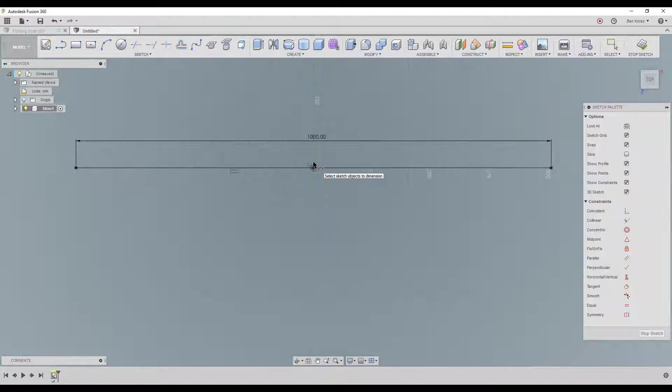So let's start, and I'm going to start with a new sketch here and create a line from here to here, and I'm gonna constrain it in the middle. Give it a dimension. It's gonna be 1 meter. Let's go a little bit back. I'm gonna drag it a bit more up and gonna create now the back side here.

I'm gonna again constrain it to this point here. Give it a dimension. It's gonna be something like 250, and I think it's going to be enough. Maybe actually 280. Let's say it's 280. Okay, and let's see if we need something else. No, we just need to turn it into a construction line.

And now we're going to work on the shape from above. So I'm going to use the spline tool. Let's see how many points I'm going to need for this one. I think I'm going to need only 3 points. I always like to start with less, and it's going to be something like that. I'm going to mirror it to the other side. And this is just to give me an idea how it's going to look and if it's the shape that I want. And I think it looks actually okay, so we can move on to the next piece.

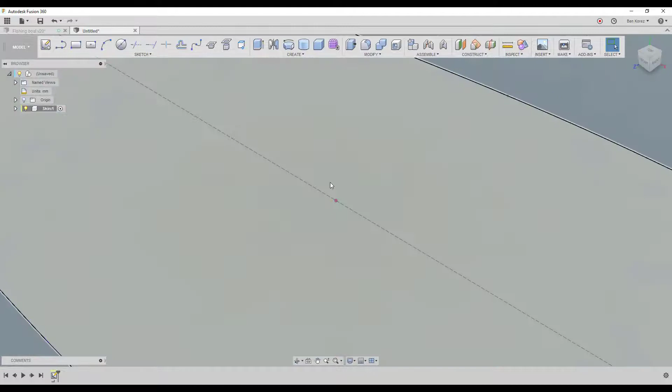I'm not sure, we can change it later, but okay, let's stop the sketch and move on to the next, and it's going to be the back. Now the order that I'm doing the sketches is quite important, and when you're gonna try it yourself, you're gonna understand why. So I'm gonna go into the plane at angle, choose this one and choose this sketch here, give it 70 degrees, something like that. I think it will be okay. You can also give it 90 degrees, it's up to you. Maybe 75, and click OK.

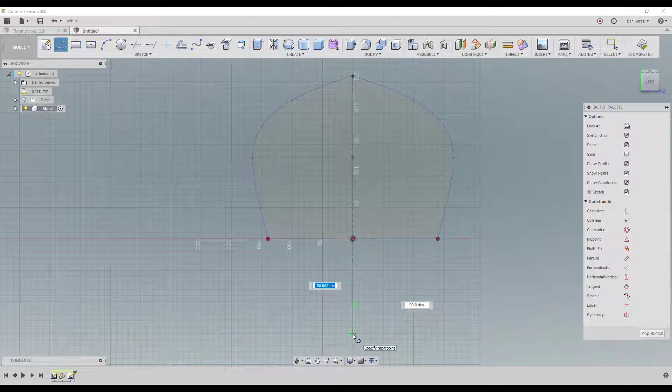Good. And now we're going to create a sketch on this plane here, and then I'm going to project this point and this point and this one here in the middle. I'm going to start with a straight line. Let's create a dimension, 150. It's okay right now. And I'm gonna create another straight line here and somewhere about here, and another one that goes all the way here.

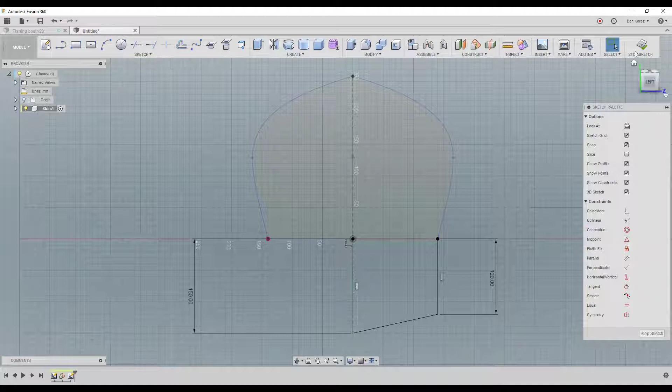Good. I don't care about the other side for now, and we'll see how it goes. We can always change it. So far so good. Again, dimensions are quite important. If you can give them now, do it now. If not, do it later. But don't forget them, because if you're gonna change something, it can screw up many things, so remember that. Another thing is I need to turn this one into a construction line. Okay, we finished this sketch.

Now we can move on to work on the side, and we're gonna do this one here. We're gonna project this point here, and let's see, I'm going to project also this one here. And now we can go into the spline. You don't have to use the spline, I just feel comfortable working with the spline.

And I'm just gonna create the shape of the bottom. Let's see, maybe I'm gonna need to use some extra points. I'm just gonna hit the control key while I'm playing with it. And maybe I'm gonna move it just a little bit more down here.

I think maybe the back side here, I need to make it a little bit longer. But we'll see. And yeah, I think I'm gonna need to add an extra point here. So no problem. Insert spline fit point. It's gonna be somewhere here.

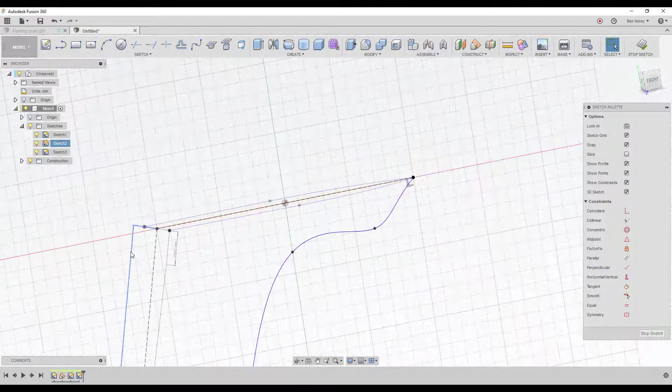Yeah, that looks much better. But this one I need to make it longer. Let's see if I can do it from here. And I need to show the dimension. Can I see it from here? Yes, but let's see, instead of 150, I can give it 170. No, something went wrong. Just go back. And maybe, yeah, that looks better.

So as you can see here also, I don't have to stop it and go back to the other sketch and all that. I can do it from here. And I'm just gonna make this one a little bit more straight. Yeah, something like that. That looks fine. Good. And now we're gonna stop this one. Next, I'm just gonna hide these dimensions.

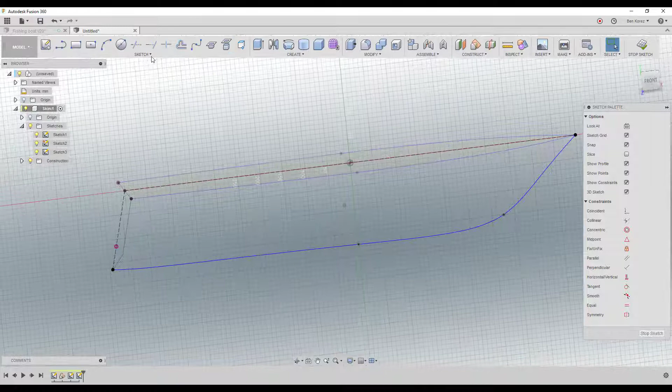There is one thing I forgot, and that is I need to project also this point here. And now I'm going to make a point. Where is it? Right here. I'm going to put it somewhere here, and I'm going to create a horizontal constraint between this one and this one. Next, something very important, I'm gonna break the line here. This is very important. Ignore the warning. I can turn this one into a construction.

Yeah, that's it. It's important because when we work on the loft command and create a second line here, it's going to help us shape the boat, the hull. So we can create a loft between this line here to the next one, and then to the bottom one. If we didn't do this, it would be one long line all the way up, and it would give us an error. So that's why.

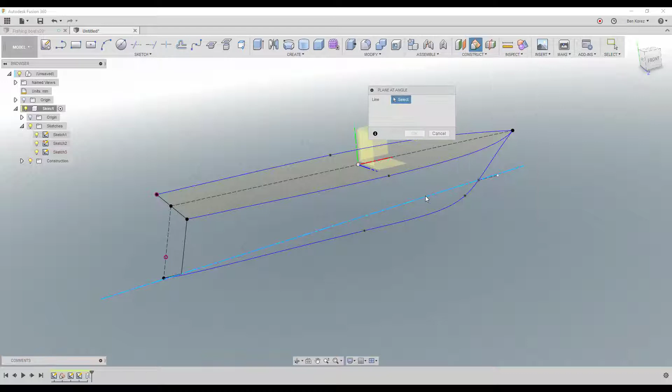Okay, so now we can move on to create 2 points here. I wanna do this one and this one here, and I'm gonna create plane at angle and give it 90 degrees and click OK. I can hide the axis here, and yep, that's what we wanted. So we can create a sketch here. It kind of turned on me. Okay, good.

Now we need to project this point here, and this point here. Going to the top view again, and we're gonna use the spline as before. We're gonna follow almost the same shape as we did earlier. And now I'm just gonna move this one a little bit more into the inside, and we can always change it later. But let's see how it looks. I'm gonna stretch it a little bit more.

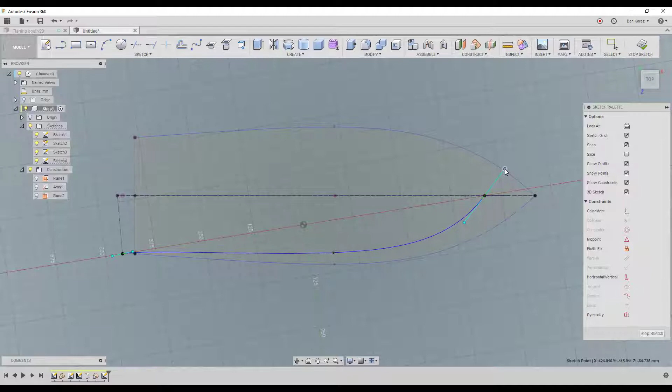Okay, I think it looks fine. Let's leave it like that for now. Maybe there is too much spacing, I don't know. Let's do it like this. Good. We can finish this one. We don't have to mirror it to the other side. Now we can go and start doing the lofts. We can go into the patch environment, go into loft, create loft.

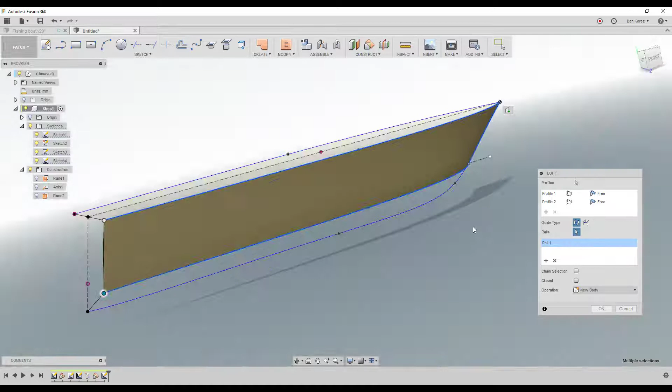Oh, sorry, something was selected before, so we can create a loft between this one and this one. Let's see if it's gonna let us create another loft here. Click on the plus. No, doesn't matter, it's not really that important. And then we can use this one here as the rail, and also this one here as the rail. Now let's turn them back on.

Create a new loft, and this one is going to be between this one and this one. Oh, sorry, I need to click on the plus because they are kind of connected to each other. And we need also a rail here, which is going to be this one here. It's very important not to forget it. Okay, good. Now it's plus minus what I'm looking for, and it looks not so bad actually.

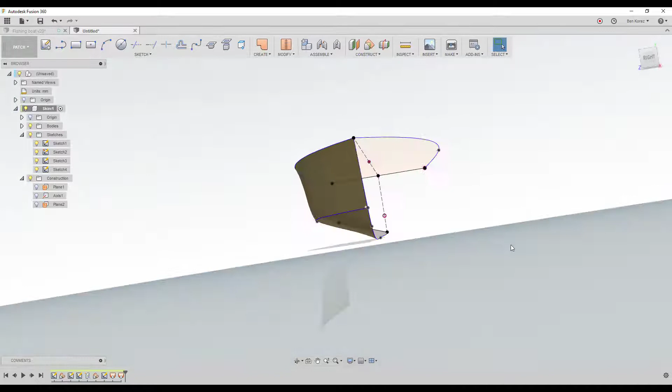So I'm going to put them together. I'm going to stitch them, and I'm going to mirror everything to the other side. So I'm going to mirror the body here, all the way to the other side. As you can see now, our boat starts getting shape.

And you have the option now to create also the back, or you can do it later. It doesn't matter really at this point, but I'm gonna create it now. Let's see if I can, no, I need to turn some of the sketches off maybe. I just need to do something like that.

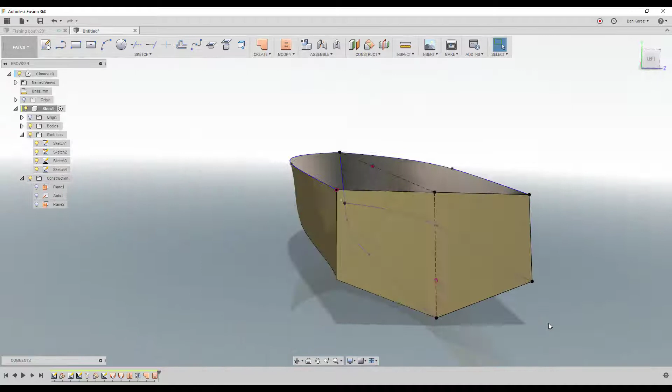Okay, and it looks okay, looks fine. So I'm gonna stitch also this one and this one together, and yeah, so far so good. It looks kind of the shape that I was looking for. Now I just want to make sure something here, that it's completely straight here at the top.

It looks really nice. Okay, next, now this is the skin. Now what we left to do is we're gonna thicken the whole body here. So I just want to make sure that we have no, see, we still have those two bodies which we need to stitch, this one and this one. Click OK, so now we have only one body.

So now we can thicken everything, and we need to thicken inwards. Okay, and we're gonna give it, let's start with 2 millimeters. And I think it will be just fine with 2. Again, don't forget, this is just a very, very small model. Okay, and click OK.

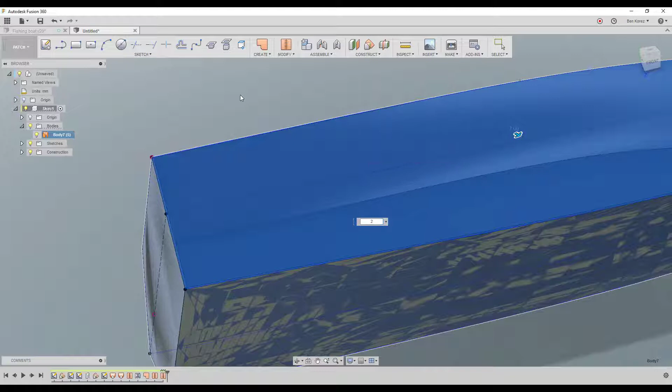Good, so this is our skin. Next, what we need to do is we can hide all the sketches. We don't need them right now. And now we're gonna work on the ribs. So we're going to right click here at the top, new component, and we're gonna call it ribs.

So we're going to create and then offset. So we're going to offset this face here, this face, this face, and this face. If you want to give it some space, you can give it a space here, but I'm not, and click OK. So we can hide for now the skin, and so we got this extra pointy here.

Now if we want, you know what, we can go back and take everything. Maybe it's gonna help. Let's see. Oh, it's not gonna help, but it doesn't matter. We don't really need it.

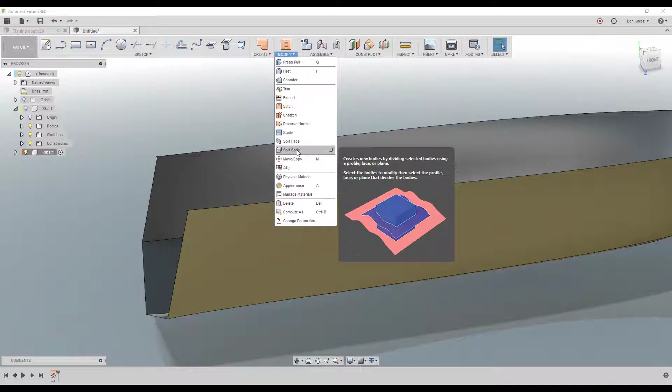So but we're gonna create, I think, a new set for this part. But to be honest, personally, it's kind of annoying me, these points here. So let's see if I can fix it. I'll look for a splitting tool. So I'm gonna go into, it's not this one, maybe it's this one.

Wait a second, I'm just gonna turn the skin on. I think it's this one, yes. Okay, yeah, now I see why it took everything. So never mind, we can cut these points in the end if it happens to you. Okay, so we're just gonna ignore it for now. It's not a big deal.

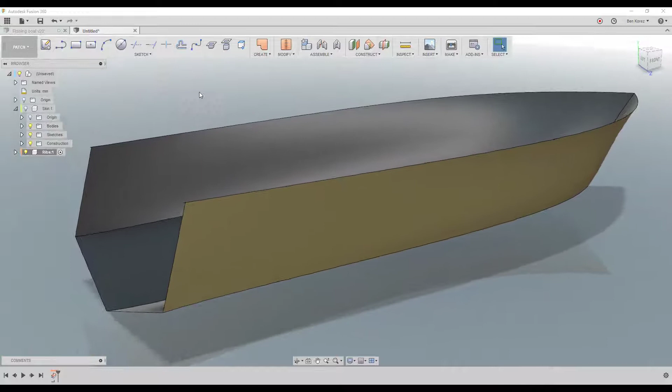So we're going to work on the ribs, as I said, and we need to give it a thickness. Second, I'm gonna select everything here, and it's going to be, yeah, again, depends on the ribs, how thick do you want them. And I mean, inwards it can be maybe 10, something like that. Okay, and then we can click, we finish with this one, can click OK.

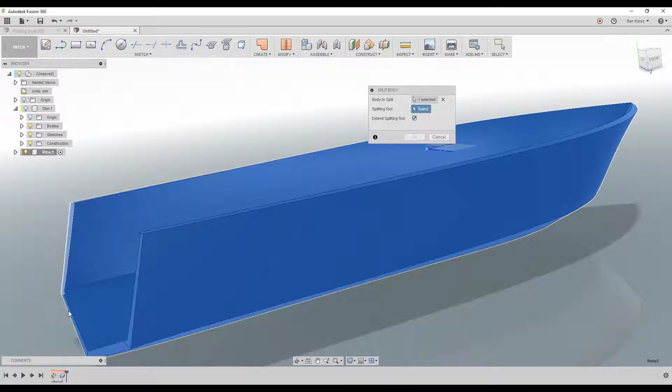Actually, this point we can actually also much easier to get rid of, but again, as I said before, doesn't matter. But I can show you actually how we do this. We can just go into split body, go into this one here, then we choose this face, give it a few seconds. So it's not gonna take all of it. No, never mind, forget it for now.

And yeah, it's stuck now because my stupid mistake. So sometimes, you know, it requires a little bit of patience. And let's wait a few seconds. See, it's gonna go away. This is one of the challenges sometimes when you're working with Fusion 360.

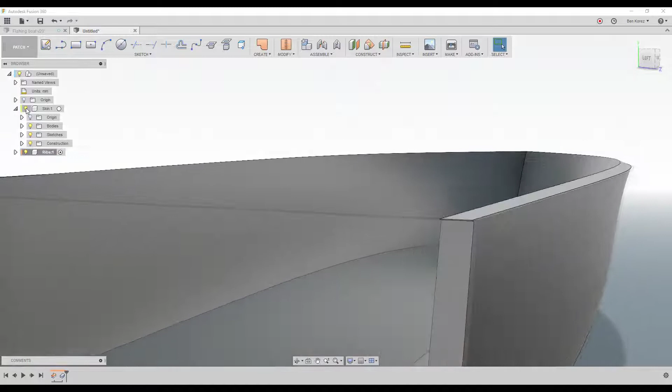It's not so forgiving, so if it doesn't like something, it's gonna tell you. Okay, now as you can see here, this one, it's got some kind of an angle which I don't really like so much. And let's see if we have this one as well here at the skin, not so much. But what I'm gonna do is, because I want to straighten it out before I'm doing everything else, we're going to split body. I'm gonna choose this one, and I'm gonna choose here the XZ axis. So now we straighten this one out. So we can go into the bodies here.

As you can see here, we got this extra one, which if we want, we can just remove, but I'll just turn it off. Unfortunately, it's going to tease us at some point, but don't worry about it.

At this point, since we're going to create the ribs, you have the option to already shape your ribs. For example, we can add some fillets over here and over here, which create the round shape on the inside of the rib.

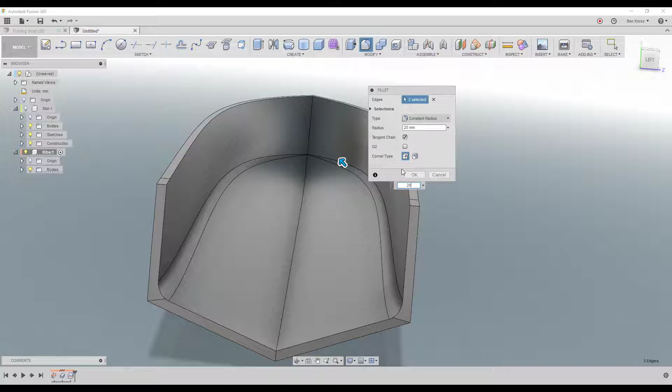Give it maybe 20 if it's going to allow us. Okay, but that's it if you want it. I didn't do it, but you can also already do it right here if you want. As you can see here on my ribs, they have a very sharp angle.

Okay, let's go back here. I'm not going to do it, and I'm going to create a new sketch right in the middle, starting from the back here. You can slice it or not, and we're going to create a rectangle somewhere here. Now this is going to be the thickness of the rib.

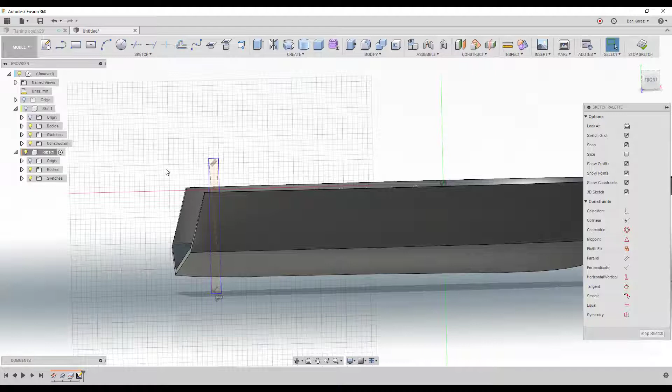It's very important that it goes all the way through outside, much higher than the boat. Now if you want the ribs to be thinner, you're just going to create something thinner, maybe 18 in thickness, and remember this one needs to go much further down here.

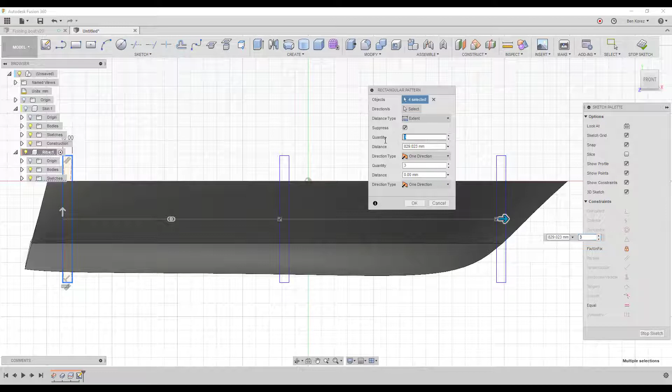Now basically what we're going to do is create a rectangular pattern. We're going to choose all of the lines here and stretch it. We'll say okay, we want it all the way to somewhere maybe here. And how many ribs do we want? Okay, I want to just say 10. Fine, click OK.

Now we can change again how thick it's going to be later. So we just finished with this one, click OK. This is the fun part - we're going to click on extrude, and we're going to select all of them.

Let's move the window, and next we're going to do intersect. It's going to be symmetrical, and let's just see, 250. Let's see how it looks.

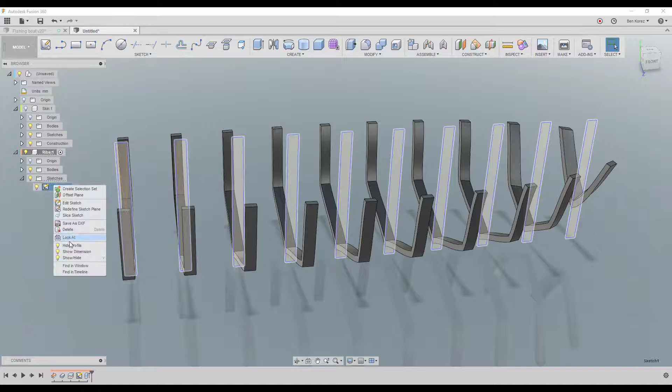And voila, so this is the ribs. And if I want to make them, as I said before, maybe thinner, we can show the dimension and change this one to maybe, I don't know, 16. Here we go, so you can just hide this one again.

Now we can turn on the skin, and you can see how it looks. See, it's already starting to shape up, and yeah, it looks really nice.

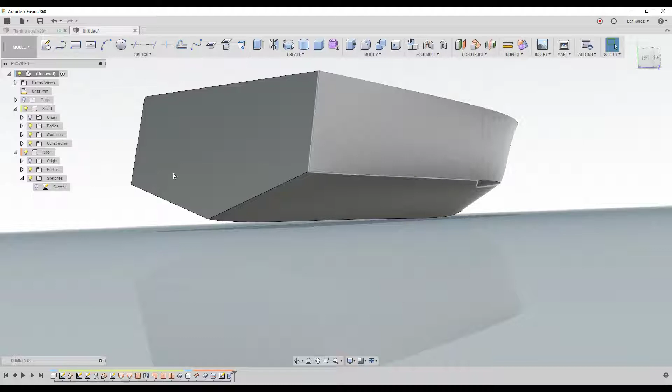Good, next what we're going to do is work on the, yeah, I don't know exactly, I forgot the name of it - the line here in the middle. It's kind of a piece of wood that's holding almost everything together, and for that we're going to create another component. I don't remember the name of it, so let's forget about it for a moment.

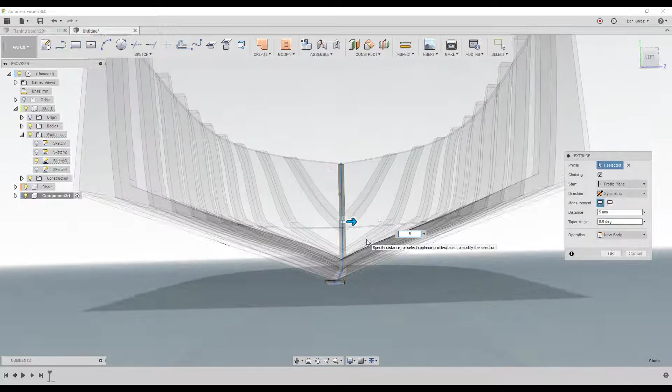We're going to go to the sketches - I think it was sketch number 3. Yeah, this is it, and I'm going to go back to the patch environment. I'm going to go into the extrude, and we're going to select it, and we want it symmetrical on both sides. Start with, I don't know, 5, something small, and see if you need thicker. I think it's okay, and yeah, 5 is okay.

Click OK, and now we're going to give it thickness - how it's going to thicken outside, but I want it to also thicken from the inside. So I'm just going to hit the minus here. I'm going to give it thickness outside later, just because it's not going to be exactly symmetrical. That's why...

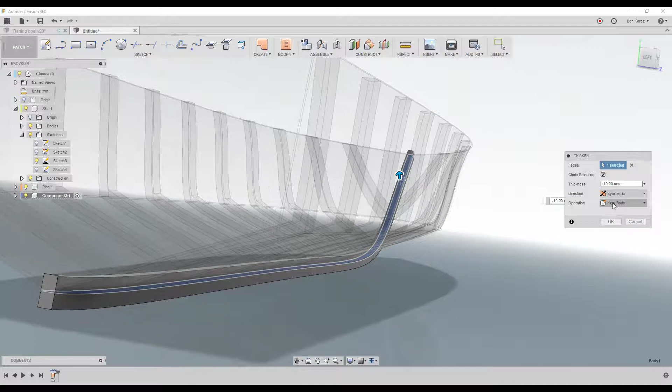You can either do it like this and then remove the thickness from the outside. It's up to you, but let's just keep it like this. Now we can also see how it's going to cut through the ribs, because the ribs need a specific cut - they're going to sit on it. So we can see if it's thick enough, or hopefully not too thick, and I think it looks fine. So I'm just going to leave it like this.

Now what we're going to do is the cant here all around. We have this cant here, so how I'm going to do this, there are various options, and I think the easiest way will be to just create a new component.

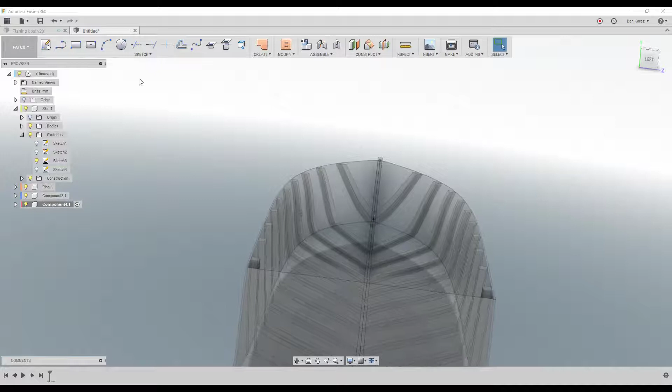Let's see here. Yeah, we can create, for example, an offset of the skin here. Just going to leave it like this, and then we can go into the Modify.

We can do an extend. We choose this line, and here it says natural. Let's give it, let's just say 5, so it's going to extend everything by 5 millimeters.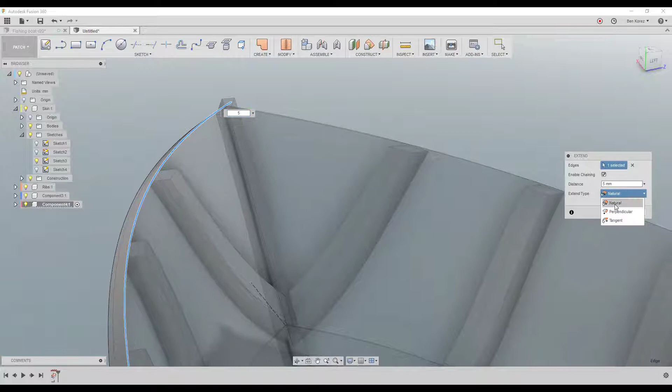I just want to make sure how it looks on the other side here, but you can see it goes upwards, so I don't like it. I'm going to do a tangent, let's see the result. Still not good. Perpendicular, obviously not good. No, it's not good, it's not going to give me the result I'm looking for. The other option, see, it doesn't look good.

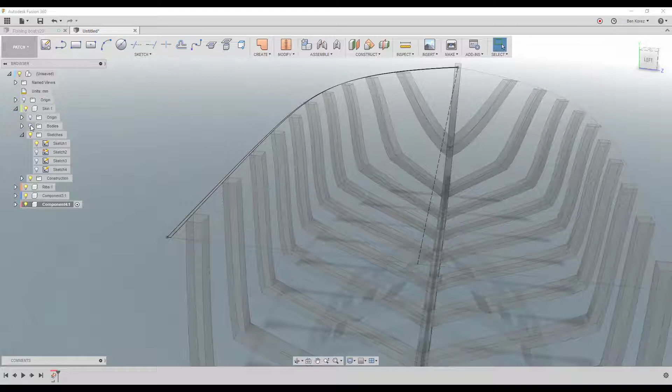It's to use the original line here from the skin, this one here. So we can hide the bodies. But just a second, need to go back one more here. Now we can go into this one, we turned it on, and not this one, we need this one here.

Now we can use this line, for example, and go into the extrude. Now it's choosing everything, so I don't want it. I just want one here, and it's extruding upwards, which is okay, that's fine.

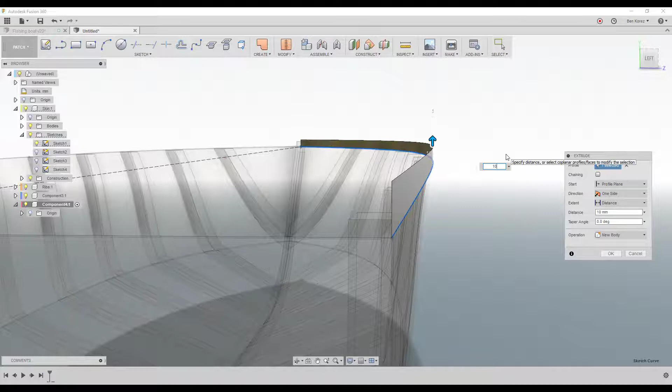And we can say, okay, I want, I don't know, 10 millimeters. It's too much, then maybe 6. Much better, I think. And I also want, let's see, symmetrical on both sides. Yeah, that's fine, and I'm going to click OK.

Now we're going to thicken this one, and let's see if it's thick enough or maybe too much. Now we can cut those ribs later if we want, or if you want to cover the ribs or not, or if you want the ribs to only reach the face of the cant here.

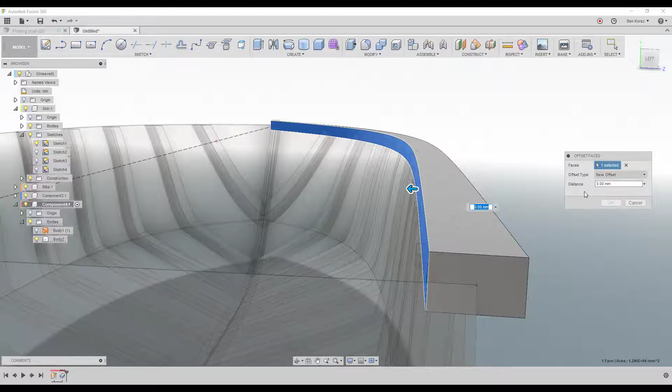I can show you how we can do this. So we could just leave it like this for a moment. We can go into the model and then press pull. We can give it an extra, a new offset of, I don't know, maybe 3 millimeters, something like that.

And then on the other side, maybe we can reduce it a little bit if it's too much, if you want—again, it's up to you. You can say -3, like that, and click OK.

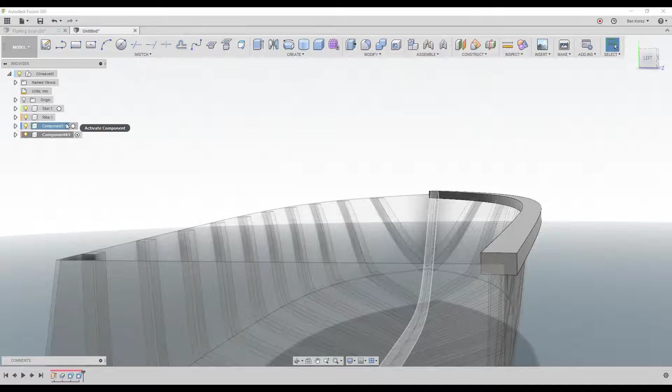Now, in order to cut the ribs, what we're going to do is, because we're going to start to shape everything now, we can hide this one, and we're going to go into—first I'm going to go into the ribs, it's here, and okay, let's just see, we pass through all of them.

Yeah, okay, so the easiest way to do is actually go into the cant here. We're going to mirror it to the other side. Okay, now just forget about this end here, we're going to fix it later.

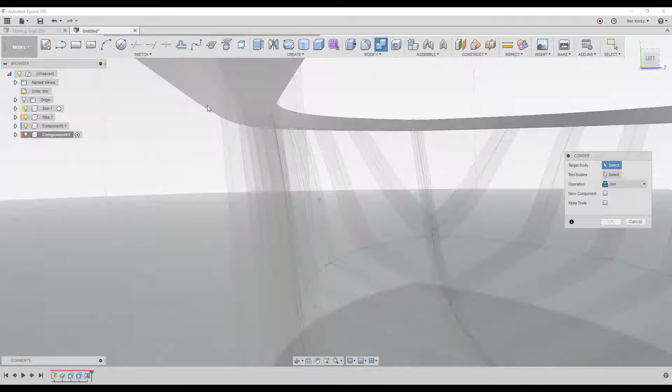What we're going to do is we're going to combine, but as far as I can see here, it doesn't go all the way through, and the combine is not going to be the best idea for that. So I'm just going to go into split body.

It's going to create a lot of body pieces, but never mind. So we're going to go and choose all of them here: 2, 3, 4, 5, 6, 7, 8, 9, 10. And the splitting tool is going to be the face here below, this face. Click OK, so now we cut all of them.

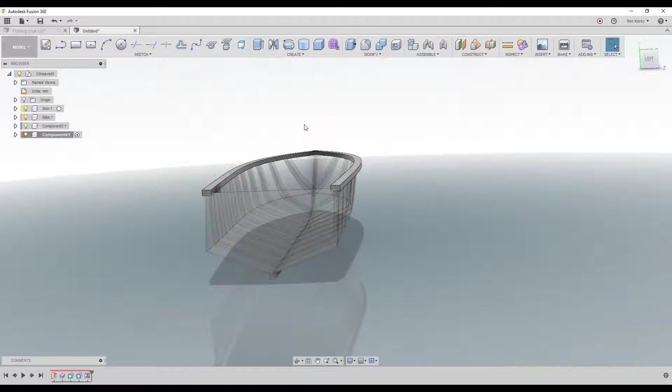So if we go to the bodies here, as you can see, boom, we have a lot of those small pieces. And let's just turn this one off, so it's going to be easier to select them actually from here. Let's go to the ribs. Okay, so we have this one.

Okay, let's just make sure we're not selecting something we're not supposed to. And last one, we actually have another one here somewhere, this one, and then we hit the V on the keyboard, and that's it. Again, you can just delete them if you want. There are too many of them. We can not delete them, but hit remove, so it's not gonna bother us later on. More, no, right click, remove. Okay, not delete. Good. So now it's clean.

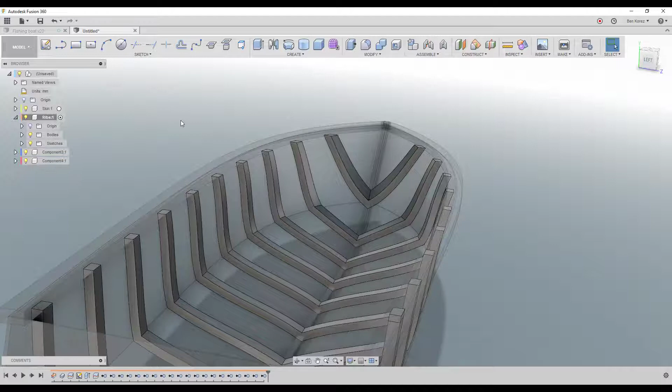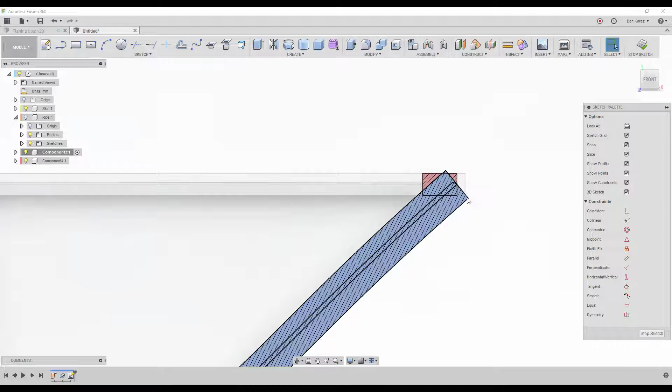Let's see how everything looks so far. It looks really nice, starting to get the shape. So we need to finish now this one here. And how we're gonna do this, first I want to create the shape for here in the front. So what I'm gonna do is, let's see what's going to be the smartest. So I'm going to this one here, and I'm going to create a new sketch here in the middle, and I'm going to slice everything. I don't need all the ribs, and I don't need the cant here, it's just disturbing me. But I know that the cant, yeah, okay, so let's keep the cant here so I can see exactly what I need to do.

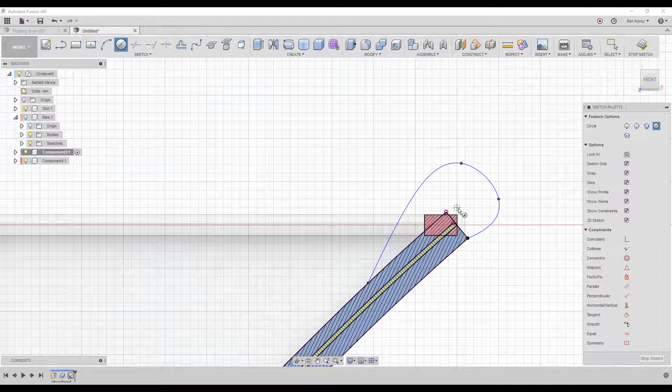Okay, good. So I'm going to project this one here and project this one here. So I'm going to take the spline tool actually, and I'm going to create some kind of a round shape. Oh, sorry, let's try again. Okay, let's make it so it's gonna look nicer. Can take it a little bit more down. And okay, maybe I can just leave it like this. Another thing maybe I'm gonna do is let's create a hole here in the middle. It's gonna be right here, and we're gonna click on OK.

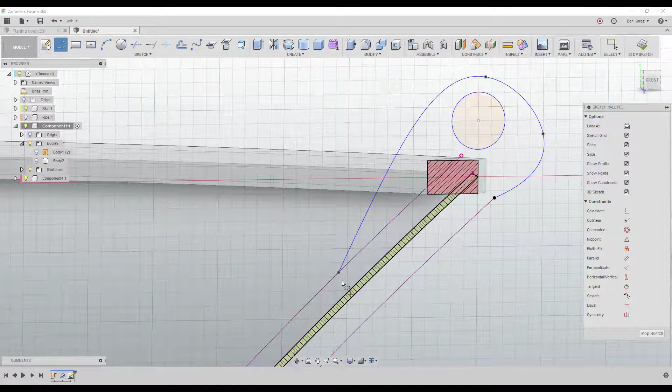So we're gonna go to extrude. Now let's see what's happened here, if it wasn't closed. No, it wasn't for some reason. And let's see why not. So we're going to choose this one and this one. If I'm gonna hide, see, this was kind of surprising because they're supposed to be closed, but it's not. And I'm just gonna hide this one for a moment. It's gonna be much easier to see, to figure out what's going on. There is a function line here, and there is one here. So what I'm gonna do is I'm going to break the link here, and I'm gonna trim maybe this one here. No, it didn't help. So for some reason, the geometry here that I've created, it's not closed, and I think it's because of the other side. I think this is why it's not working, because it's open on the other side. Yeah, that's why.

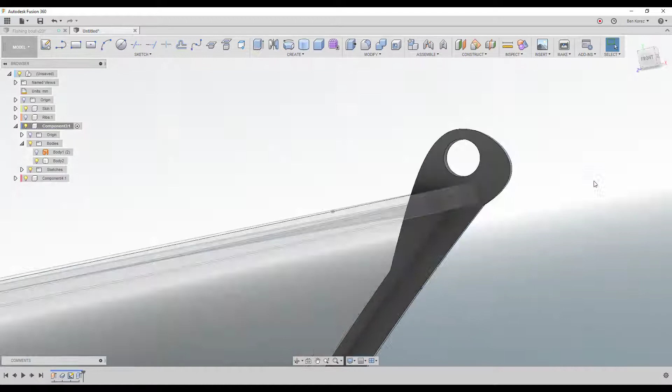So, gonna click OK here, and I'm going to extrude this one. It's gonna be both sides symmetrical, and don't forget we need this one, and it's gonna take all the way up to, come on, let's push it a little bit, help it, and into this surface, and we want it to be joined, and let's see, and click OK. Good. So this is how it's going to look like.

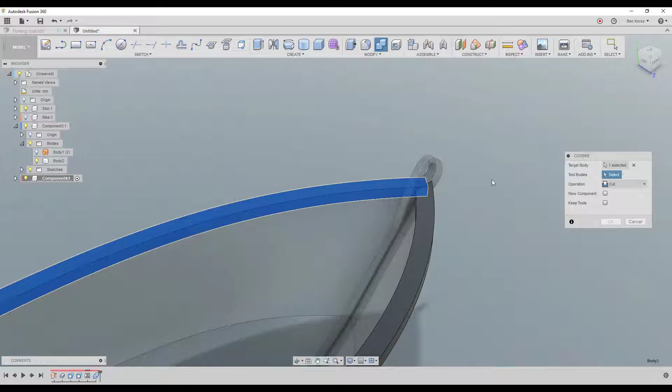And now we go back to the cant here. How we're going to fix it is we're going to choose this one, this cant, and this cant. It's not really a join, it's going to be a cut. And sorry, so it's this one. Let's see if we can do them both. No, we cannot. So it's one by one, and the tool, it's going to be this one. But I just need to make sure that it's fine. Oh, another thing I forgot, it's to keep tools. And now let's do the other part. Gonna select this one. It's cut, and the tool, it's this one, and keep tools. Good.

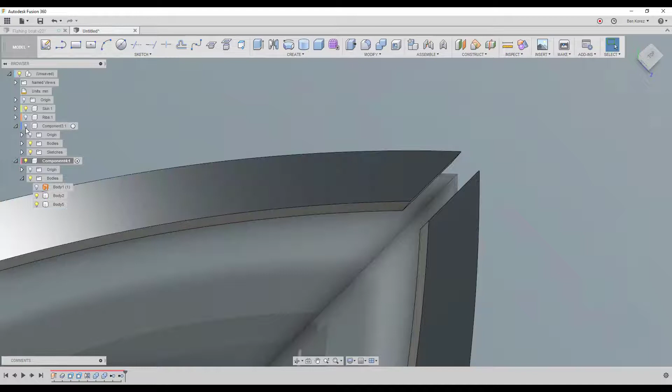So now we have some extras here. You can either combine them or, you know, delete them. It doesn't matter. See this piece up. If we go into the, you can see them here, those extras from this part here. So we can do this, can do like this. Now we just join them together, or, all right, if we go inside here, see, it's this piece and this one. So these two, we can just remove them. We don't need them. Good. So everything is starting to look really, really nice.

Let's turn on the ribs. It also looks beautiful. And another thing left for us to do is to work on the bottom. Now this is also gonna be kind of fun to create, and it's also relatively easy to create. And yeah, let's see how we're gonna do this. Okay. Again, I'm thinking out loud, so you can just ignore it or not. Let's create a new component. Now to create it, there are different ways to do it, but I think maybe one of the easiest ones is to create an offset.

Let's go to the origin here, and we can say, okay, I want to offset. I want the bottom to be somewhere about here. See how it looks. Maybe somewhere here. Sorry, minus 130. Oh.

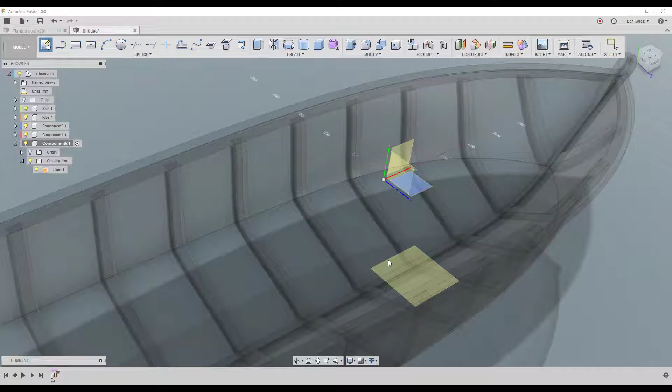Let's try again. Offset plane, minus 130. Good. So we can turn this one off. And we need to create a sketch here at the bottom. Now, of the options here, let's see, the smartest is going to be to use project intersect. And so we can project everything here, which means we're going to have both lines. Okay, I need this line here in the middle, and it's quite important. So I'm gonna click OK.

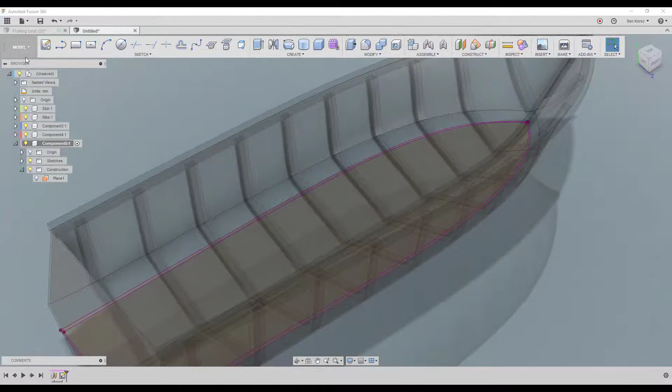And I'm gonna go into the patch environment, and then I'm gonna create a patch here. So this one, and this one here. Good. And I'm going to thicken this one, maybe upward. Thicken up, one side. I'm not gonna go through everything. It's gonna be less, it's gonna be, I don't know, 5, half of this one. And we're gonna click OK.

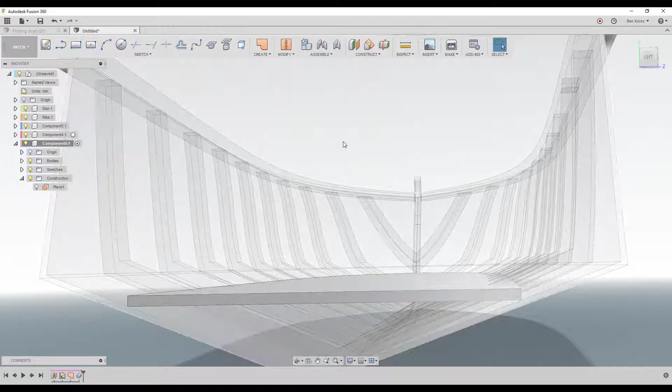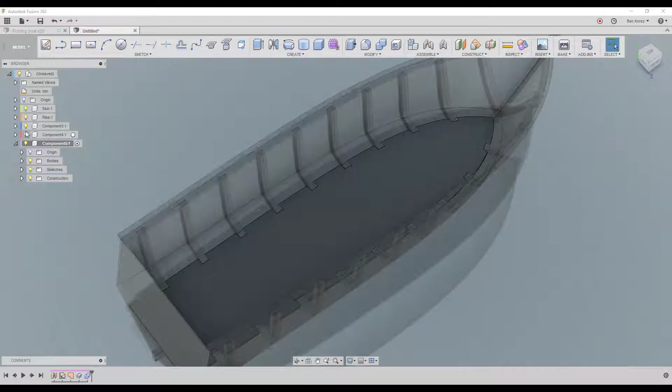Next, so we have our body here. We're gonna go into the model. We're going to combine, and we select this one. It's gonna be a cut, keep tooling, as I did before. This one, and this one. And this one, if it touches, no, so we can ignore this one. And we click OK. So now you see also why I did this one. Because if I hide the ribs, you can see we got the shapes. Okay, so that's why. So this one is also ready.

And let's see everything together. If you want, we can turn on the inspect component color cycling, so you have some kind of a contrast. Now if we wanted, we can also push it much higher. Okay, and yeah, it's coming along pretty nice. Now I want to create some kind of a bench here, so I can sit and pedal. How are we gonna create a bench here?

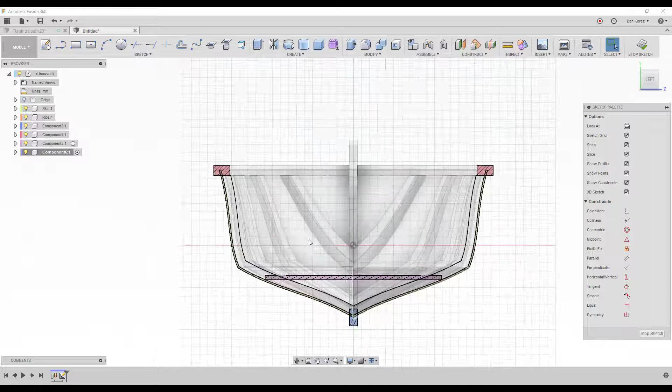We're gonna create a new component and create an offset plane, and I'm gonna create the bench. Maybe I'm gonna create it here this time. Click OK. Go into create a new sketch, and we're gonna slice it. So for the bench, we're going to do some intersection projection, and it's going to be this one here. And how high it's going to be, somewhere like this. Okay, now let's hide the ribs for a moment, let's hide almost everything.

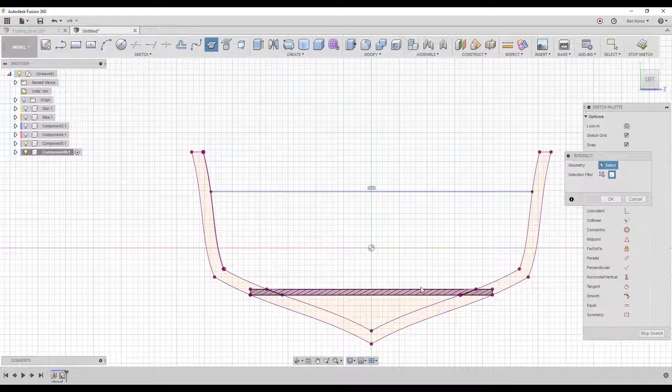I need to also intersect this one here, the bottom part, everything. It's quite important. So okay, good. So there's some kind of double intersection here as it looks. Let's go deeper. This one, for example, we don't need, so we can delete it, but we need to make sure that this one attaches all the way to the other side. And now it's a closed shape. Okay, so we're gonna stop the sketch now. We can turn everything back on.

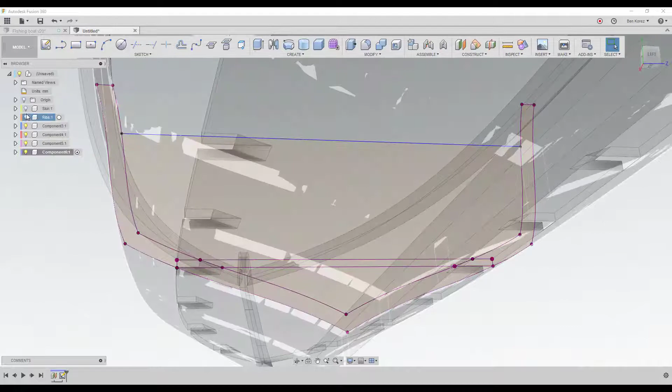Now we can go and do extrude back all the way here. It's going to be a new body, and we click OK. Next, I want to make it hollow, both sides, 3 millimeters, and we're going to click OK. So see, very simple, creating the bench. Again, let's go all the way back.

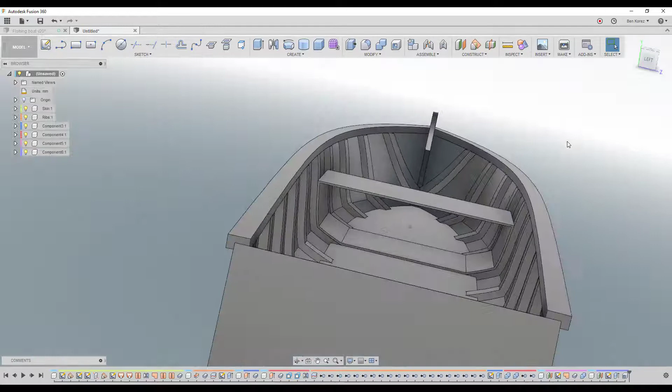And it's precise, we got the shape of everything, and it's going to be really nice because this way it's going to be much easier afterwards if you want to create a DXF file. We're just going to project this profile and we can cut it so it's going to be an exact fit for the ribs. Okay, so it looks really nice.

Now we're going to create the place here for the pedals, and again we're going to create a new component, and if it's straight enough, I'm going to create it here, and I'm going to create a sketch here. Now where we want it, somewhere. Let's start by projecting everything here. So we know this is the bench, so it's going to be somewhere here. So I'm going to create a straight line from here to here, and another one from here to here.

Again, people are going to ask me, why didn't you do it another way? Well, I'm just showing you how we can do it. And what we need more is, I'm going to create now a kind of a center line between this one and this one. That's good. And I'm going to create another center line here.

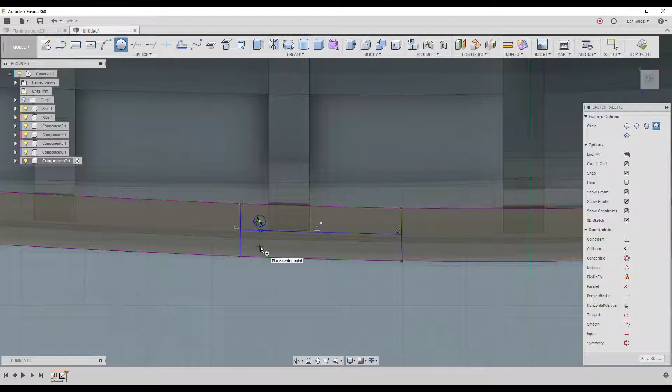And this is just so I know where the center is. And it's going to be something like, yeah, 4.5, and another one maybe somewhere here, also 4.5. Now let's see the distance here, and 9, and the distance between this one to this one, it's gonna be 4.5. Oh, sorry. Not good. I need to push it this direction here.

7, maybe 8. Again, what I'm trying to do here is constrain everything. It's very important. And now I can go into mirror. I can select this one, and then we can use this line here that we did. But as you can see, because it's kind of a round shape, it doesn't really work as I wish it would. So I'm gonna have to recreate them.

So now it's like 4.5 here, but again, this is just the holes for the screws. You're gonna see it in a moment. Now at least it's 9 between those two. And I know that between this one and this one we had 8, and it looks okay. It's okay for now. We can sit down and work and make it more precise, you know.

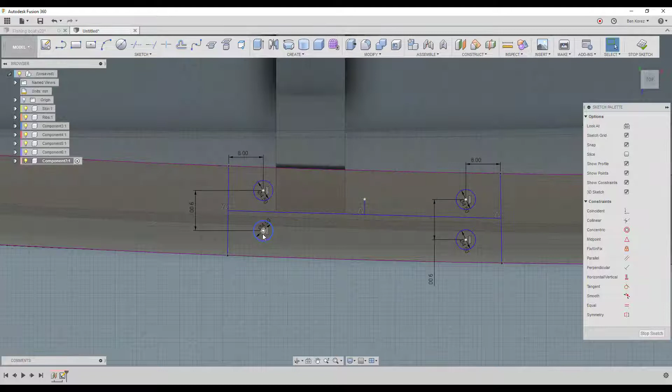Oh, one thing I forgot here. Great. And so far I'm just gonna move it a little bit here. Another thing is the line between this one and this one, 63, that's okay. And I can create them also parallel to each other if I want. This one is parallel to this one, or not, but that's okay. This one is just a construction, as well as this one, and we click finish.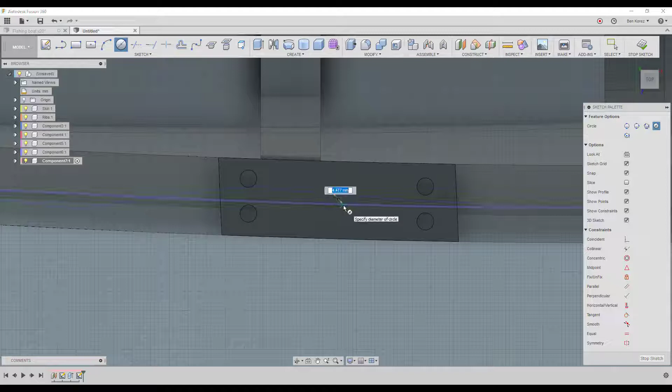So we can now extrude this one all the way up, maybe 5 millimeters, and click OK. Next, we're going to create a new sketch right here, and it's going to be a circle somewhere here in the center. Again, you're more than welcome to work on the measurement here. And this one is going to be 8. That's fine. We're going to extrude this one out somewhere here.

11. And now we need to create an axis here through this one, and we're going to create a surface here, and we're gonna go just, you know, make it faster. So either you can create this one here, or I'm going to create a new sketch here. I know this is my center, and let's see how big I'm gonna make it.

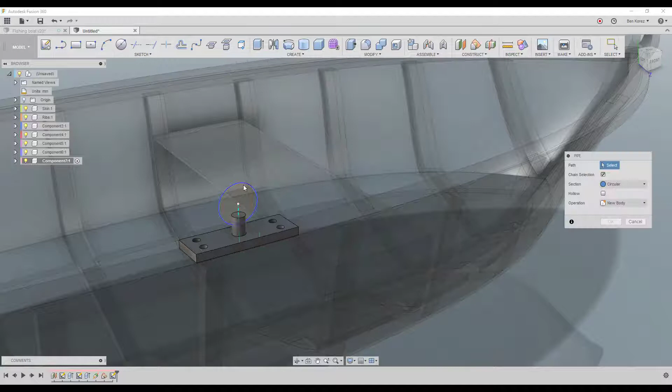So this is just a technique. I'm just gonna show you how you can create these, and go, sorry, into the pipe command, how we're gonna create this ring. And yeah, just give it a thickness of, I don't know, 3 maybe, something like that, and hit OK. Let's go into the construction here. Now at this point it's quite easy to continue. I'm sure you know what to do.

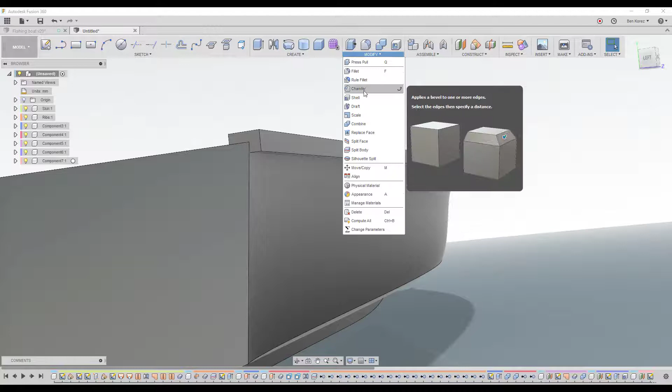So I'm just gonna mirror this one to the other side, because now we're going to do the paddles, but here you just need to work on the finishes, you know, create maybe fillets, or you can create also a draft here, not draft, where is it, chamfer here, I don't know, 3, something like that. Start shaping everything together. Okay, so the finishes I'm gonna let you work with. I'm sure you don't need my help for that.

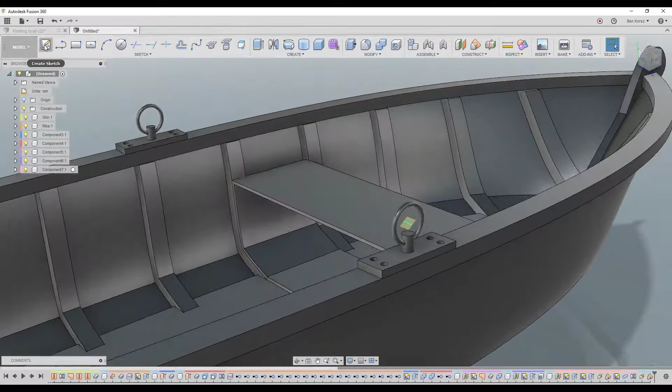But here, how I created the paddle, I just went to the axis through this one here. So I have an axis here, then again plane at angle, and then I give it some kind of, I don't remember the exact angle. Maybe it was, yeah, 34, 36, something like that. Hit OK. Now I created a sketch here. Okay, and I'm just gonna slice it, so it's gonna be easy to see where we are.

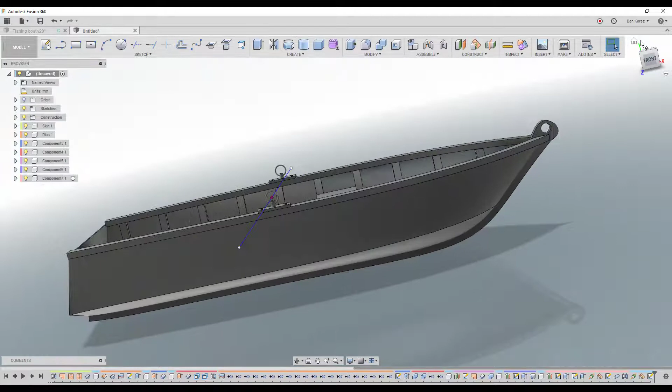So here is our center point. So I'm gonna go a little bit back. I'm gonna decide, let's just say it's from here to somewhere about here. Click OK. Then we're going to just create a constraint here. So now it's right in the middle. The length, yeah, just play with it. Click OK. Okay, now you get it. So you can go into the pipe command again, and it's new body.

Now basically I forgot to create, you know, I needed to create a new component for that. Okay, so it's gonna be something like, actually maybe 10, and click OK. As you can see, I did it completely wrong, so I'm gonna show you again. We have to create a new component. Okay, if you do it right. If not, then don't do it. Here you go.

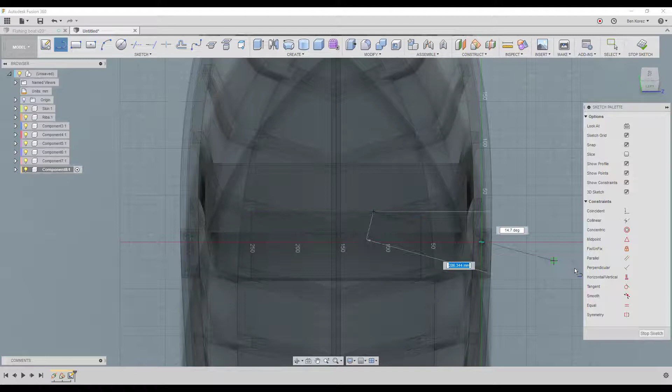Again, it was something like 45 degrees or 40 degrees. So we're gonna create a sketch here. And it was somewhere between, I don't know, here all the way to here. Okay, now we're going to just constrain it here to the middle point, to the origin. Let's see how it looks. This one we can just delete, we don't need it.

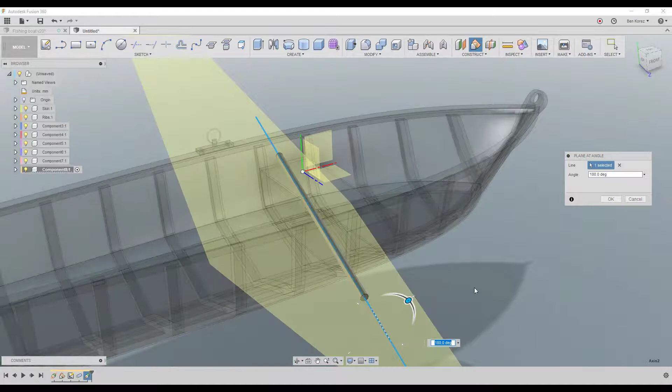And we went into the pipe command, gave it like 10 or something, and we click OK. Now we need to create the flat side here. Again, it's not so complicated. We're just going through the same procedure here. Then we go into the plane at angle. Then you decide the angle that you want. You can also have it this way.

Create a sketch on this here. We're going to slice it. And then we can just, you know, work on the shape. Maybe something like that, maybe this size. And actually maybe I'm gonna do something I normally don't do, and it is I'm going to create fillets. Oh, I know, it's showing fillets here and here.

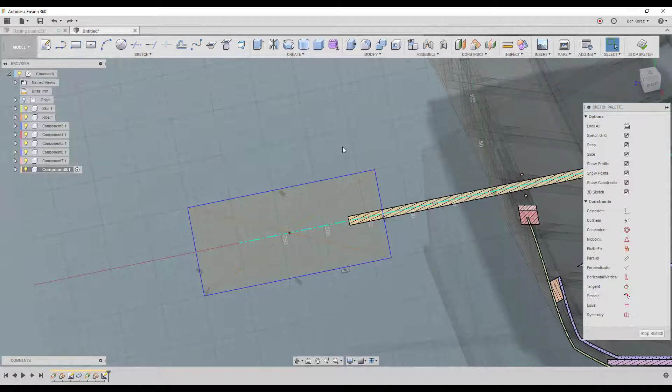Oh, something is not right here. Let's try again. Fillets between this line and this line. Can increase the fillets if we want, and the same one here to here. Okay, finish it, extrude it both sides, symmetrical, I don't know, 1 millimeter, something like this. It's going to be join, and voila. So now you have it on both sides.

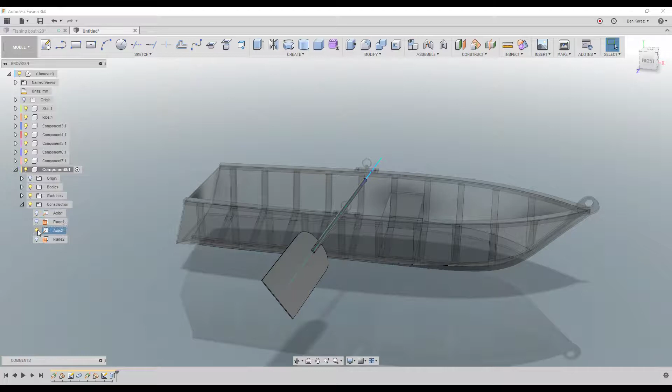I'm just gonna hide these construction lines. Now we can mirror this to the other side. This one into here, and let's see the results now. And here we go. This is the boat. As you can see, it wasn't that complicated. It's quite simple. All you gotta do now is start working on the finishes and the different cuts, which you basically already know by now.

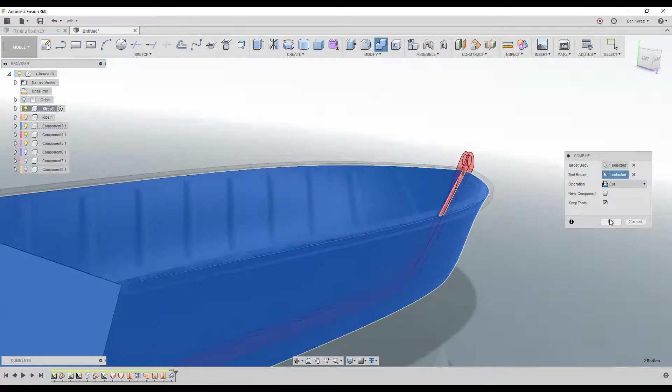For example, right here below, we need to cut the skin here. So how are we gonna do it? Because right now the skin goes all the way to the other side, but we need to make the cut because it's gonna go all the way to this side here. So the usual, we can use the combine. It's the easiest way. If we go into this one here and we want to cut, we want to keep the tools and choose this one here, keep tools, and then click OK.

Now if we hide it, let's see, where is it? This one here. So if we hide it, as you can see, we have the exact cut that we want. And this one we can just remove and create a new one behind, and you can do everything that you want. And again, it goes for the ribs.

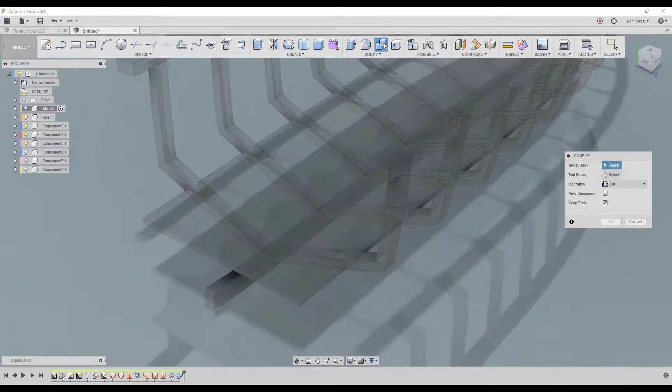I'm going to put it back on. I'm going to hide this one. We need to create cuts for the ribs to sit on this piece here. So let's just hide the plate here. I'm going to select all those. Let's see if it's going to let us do multi-selection. Nope, unfortunately not. So you're going to have to do it one by one at this point, but it's not a big deal. I'm just going to do one,

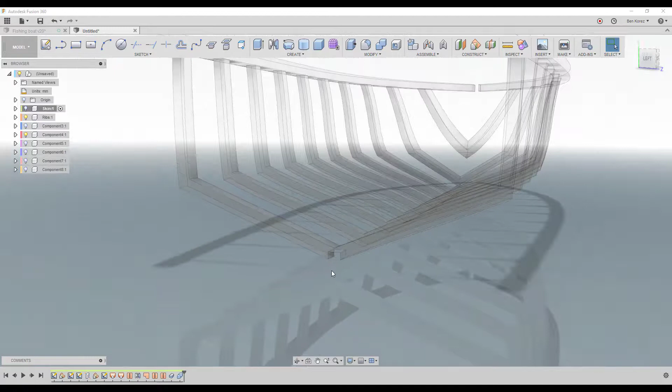and you're going to cut it. Let's see what this error means. The object that you're creating is not visible. Don't worry about it. And as you can see here, if I hide this one, we got the exact cut that we want for the rib. Okay, so you can just continue from now, and if you have any questions, just let me know.